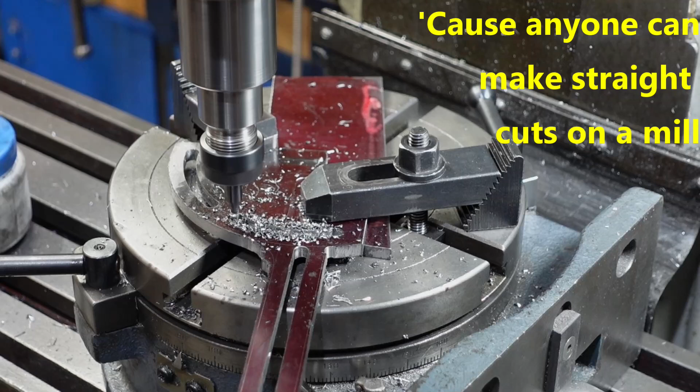G'day. Today I've spent most of today, and for that matter a good portion of yesterday, making up this thing. This is the bracket on the grinder that controls the angle of the point, as well as allows you to adjust for the length of drill bit when you're grinding. For a flat part, it took a bit of work, so I'm going to run through how that's done today.

Use of the rotary table, you can file. I actually blended a few things in with the file just to get that final finish. One thing to note too on the drawing, which I'll flash up later, that slot is dimensioned as 5, but it's actually 6. I put a correction on the drawing, but just make a note of that if you're building one of these at home.

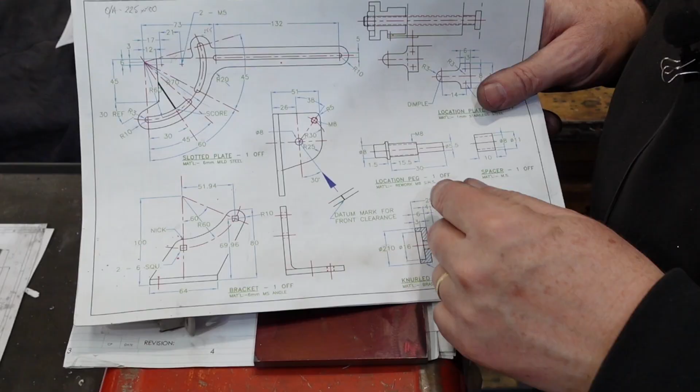The next part I want to tackle, the next major part I want to tackle is this one. This is pretty much key to the whole get your angles right thing. And so I'm going to start on this one just so at least I've got it done and I know where it is and all that sort of stuff.

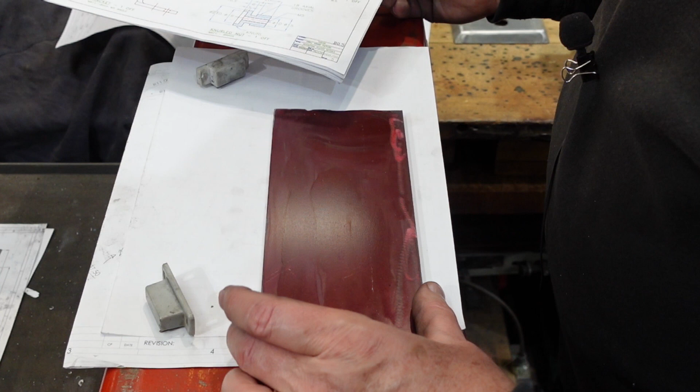It's made out of a bit of 6mm plate, and I've already, I was going to say blued this up, it's actually red. I've already redded this up. I'm going to be doing a lot of marking out.

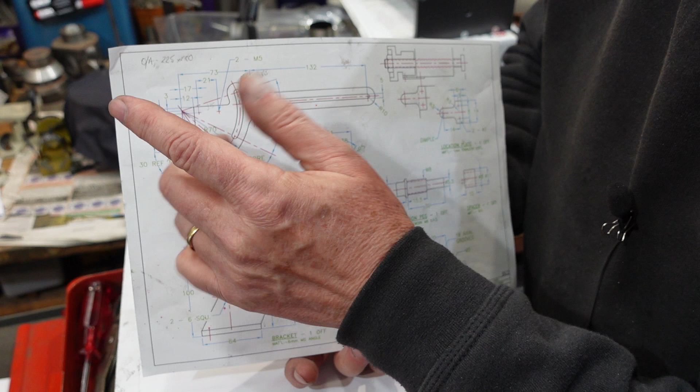Possibly the most important spot on this part is this one here, which is not actually on the part. It's sitting out there in free space. So what I'm going to do with this is make up or leave a tab on here, or leave a flap of metal, whatever you want to call it, with that location centre popped on. That's what I'm going to use to run these radii and also curve some of these things.

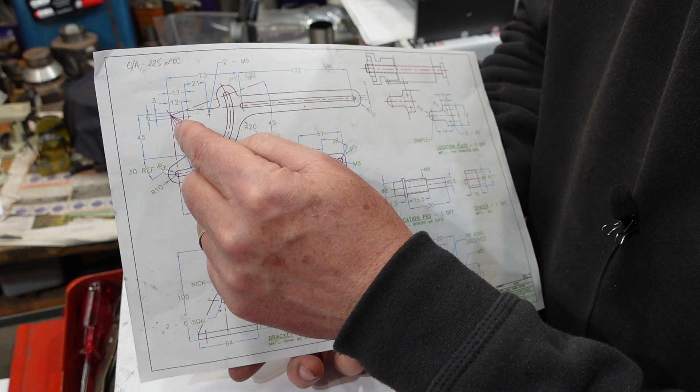The rest of it could be done, I guess, with an angle grinder or something like that just to dress it up. But I do want these radii smooth and concentric with each other. So I'll leave that there, and that'll probably be one of the last things I take off. I'll get everything else to size and shape, and then once I'm happy with everything, cut that bit off.

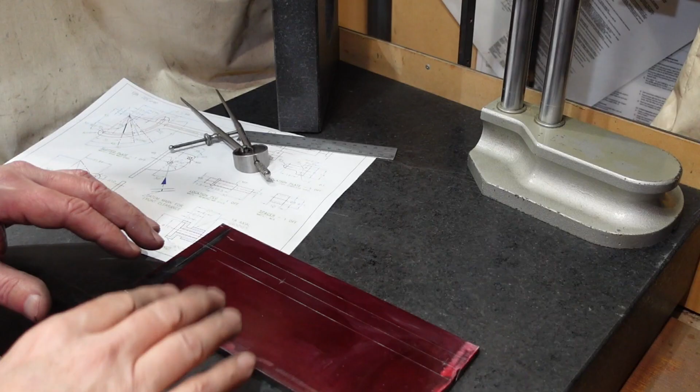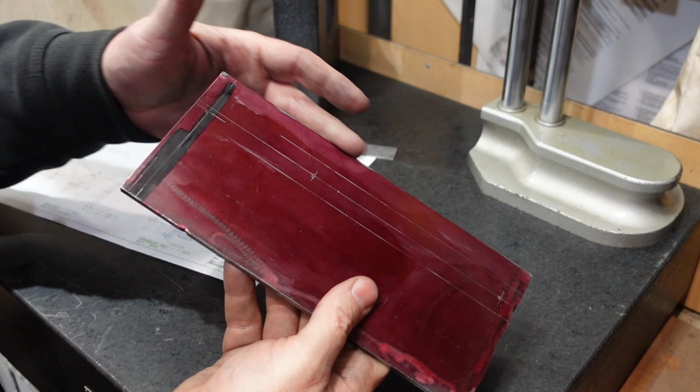So I've started marking out my bit of plate. This was cut from a larger piece with a plasma cutter, so I've got dings on this end, or kerf there, but I've squared that up in the mill, actually both sides, so that firstly I've got something to hang on to, but secondly I've got a square corner that I can work to.

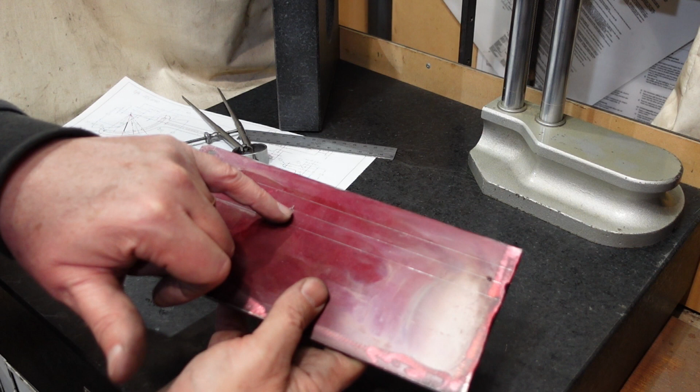So it's just a matter of running lines with the height gauge across. When I've got a centre for a circle, I'll put a centre pop, and that helps there.

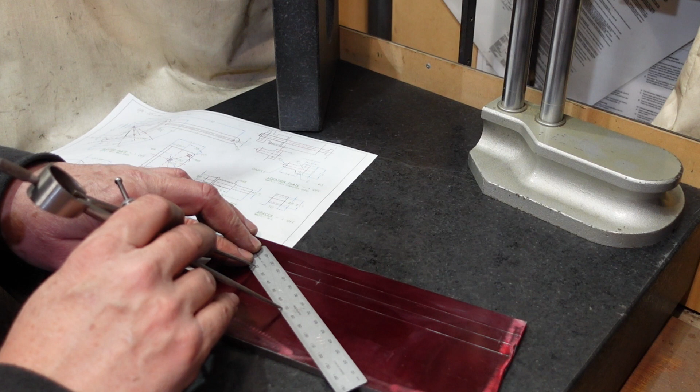I'm just about to start putting some radii in here, and for those of you who don't do this sort of stuff, one of the tricks there, I need an outside radius of 70. So if I put one end of my dividers on the 10 mark and I take this to 80, that gives me 70. But it's better than trying to find the end of the rule there and think you've got it right, because with most of these steel rules, you can put the end of the divider into the graduation mark, and everything is relatively stable.

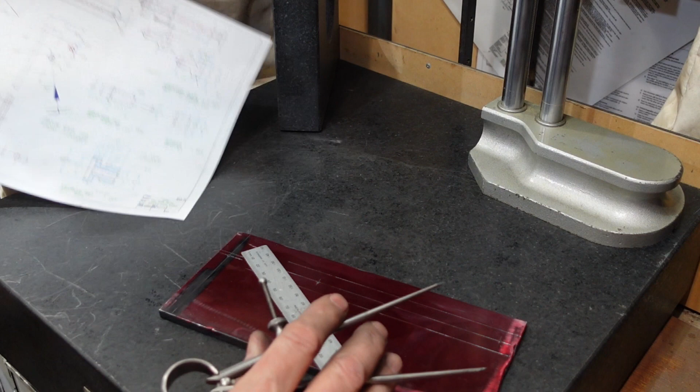So anyway, I'll continue doing this until I get this completely marked out. I don't know how well this is all going to show up, but we'll try. So I've got points in there for the start and finish of my two arcs.

I've got my slot there. I've got some points here offset, because that's how I'm going to form the radii in there, in this case a 6mm drill. There's my datum point. I'm going to leave that on a little tab there until I can't possibly live without it. Live with it. What else is there to note here?

Oh, I'm a little bit short here. I cut my material a bit too meanly, so I'll have to build that up with a little bit of weld. That's not a big problem. Over here I've got a similar issue, but that's just a nick from the plasma cutter, so I may or may not worry about that.

We'll see how we go. So this black mark here is basically from one of the lines skipping a little bit when I was marking it out, so I had to recover from that. I could either put some more of the red layout fluid on there, or just texta it, put a black mark on there and rescribe it, and that gives me my point there.

With these, I think I'll do that slot before I take this material off. What I'll also do is put some 6mm holes here, here and here, and that'll give me the inside radii there, so that when I come to mill this off, I can just come along up to the tangent point of the radius.

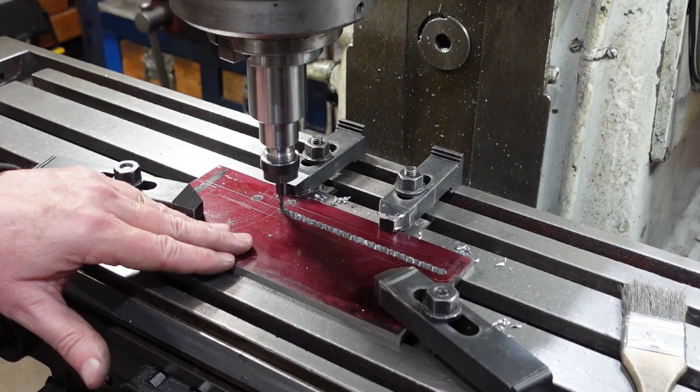I have my plate clamped directly to the mill table with the slot over one of the T-slots. Originally I was thinking about putting that in the vise, but then I worked out that with the vise pressure here, it was going to firstly tend to close that slot up, but as the slot progressed, I'd probably lose my clamping force anyway, and have the potential of the plate going anywhere.

What I've done here is a technique called chain drilling, and back in the days before mills were cheap, that's how people made parts like this. They drilled a whole bunch of holes, and then using a file they would slowly enlarge those holes and join them up and go from there.

One thing with this is that it was done with a 5.5mm drill, and you can't get too much overlap. If you do, the drill tends to want to go into the next hole, and then you've got problems with drills snapping and that sort of thing. So you need to be careful about how closely you get these things together.

The important thing is it's a 4mm end mill, and I'm going to use that to clean the slot up, then slowly, one side then the other, smooth that out so I get a nice parallel slot. This is actually quite important - you don't want it lumpy and bumpy, because otherwise the holder won't slide nicely and won't keep the right orientation as it moves forward.

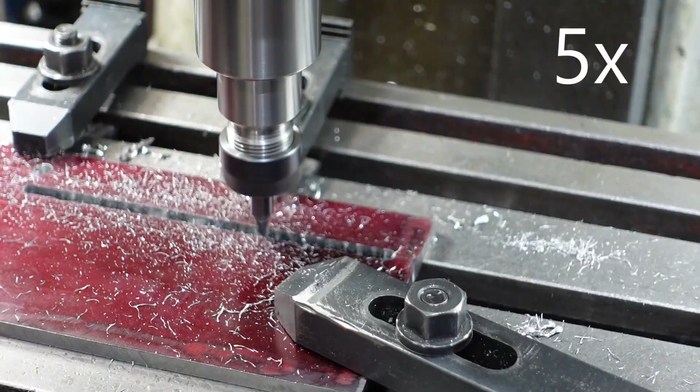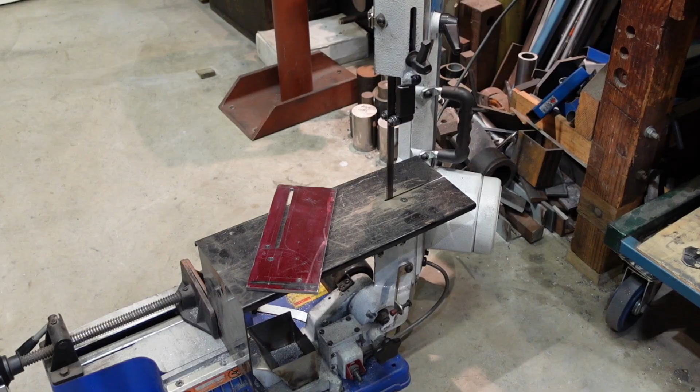Many passes later, there's my slot. That's a 6mm dowel, which is what I'm going to use in there, and that's just a nice fit in there. I haven't deburred that, so once I knock the burrs off the corners, it'll probably be a little bit looser. On to one of the potentially more hazardous parts of doing this.

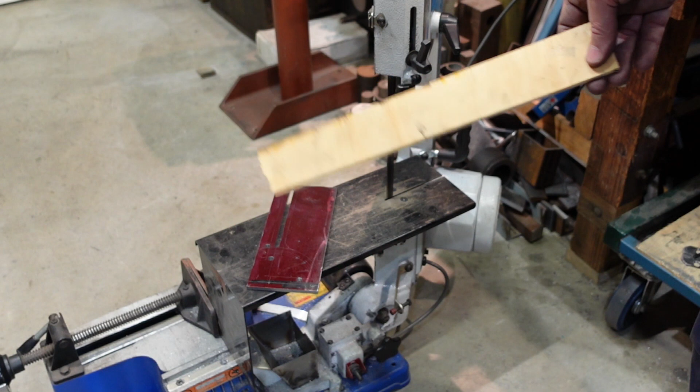I'm going to rough out the shape with the horizontal bandsaw in its vertical mode. The reason I say it's potentially hazardous is because you're going to have a large amount of blade sitting there, and for those of you who don't use these in vertical mode very often, remember your push stick. You don't ever want to be in the situation where your hand or arm is in direct line of the blade, so that if something breaks, snaps, gives way, or hits a void, your hand goes into the blade.

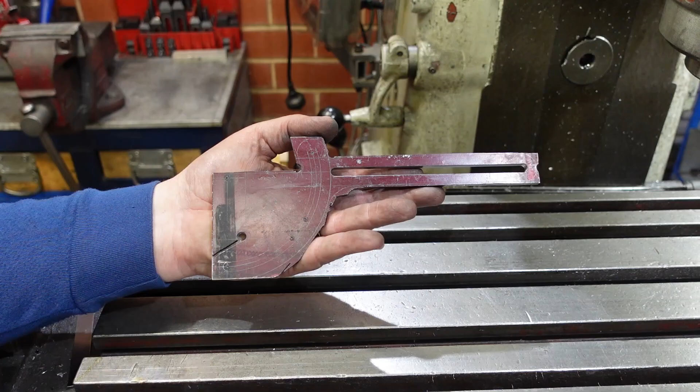This is where I'm up to. I've got my centre point there still, so I can do my arcs. I've trimmed away that material with the bandsaw. I had to do some of the shortcuts with a hacksaw, which I was trying to avoid, but the half-inch blade on the bandsaw doesn't turn all that easily. The one on the hacksaw is not that much better, I must admit, but I've got that roughly hacked out, so I need to neaten that up.

I think the next thing I'll do is probably add some material down here, build that up a little bit, and then I can come in and set this up on the rotary table and actually do some profiling. The slot turned out all right - there's a couple of dings there where the drill bit has wandered. I'm now set up to start carving out some radii.

I've centered my rotary table. I've got my key center pop centered underneath that, and so I'm now just going to run a cut around, smooth that out. The piece of stuff I added, using weld, seems to have stuck them quite nicely, and then it's a matter of doing these two slots here.

I've got this jacked up on a bit of plate just so that I don't cut into my rotary table. I think I should be right here with the slots. I might just nibble on the corner of that, but I'll control the depth, so that should be all right. I'm ready to do these

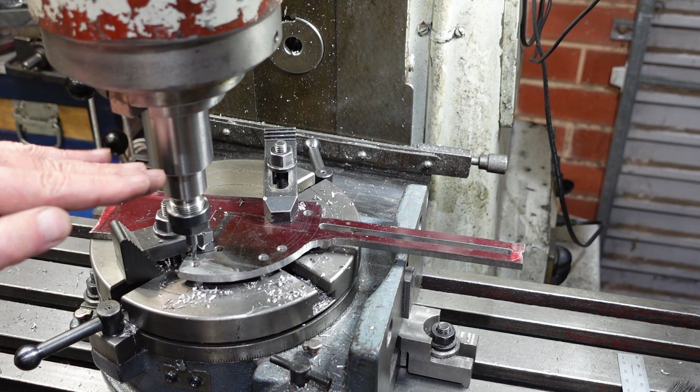6mm wide slots at a radius 60. What I've done is I've drilled diameter 6 holes at each end of the slot. I've got my 4mm cutter, and I'm going to be just sort of lowering it in a millimetre or so at a time until I break through. And then, as I do with straight slots, I'll be offsetting it either side of that centre line until I get to that 6mm.

It's a 2 flute slot cutting end mill, so I could plunge right in, but I'm always a little bit wary of doing that because the cutters deflect a little bit and you don't know whether you're going the wrong way. So there's the first slot done.

So yes, running the cutter down, 1.2mm depth of cut to plunge through, and then offsetting 1 millimetre either side to bring it out to 6. It's actually, I think, 6.1 or something like that. Now on with the next one.

One thing I will mention, when doing this, I find that it's useful to use one of the rotary table clamps to provide a bit of drag on your table. If you don't have that on there, you'll feel every little twitch in the table. If you have that on there, it just smooths it out a little bit, makes it a little bit easier to see where you're going, control it, and feel comfortable with it. So you have to be careful you don't put too much on, but yeah, just a little bit of pressure there does help.

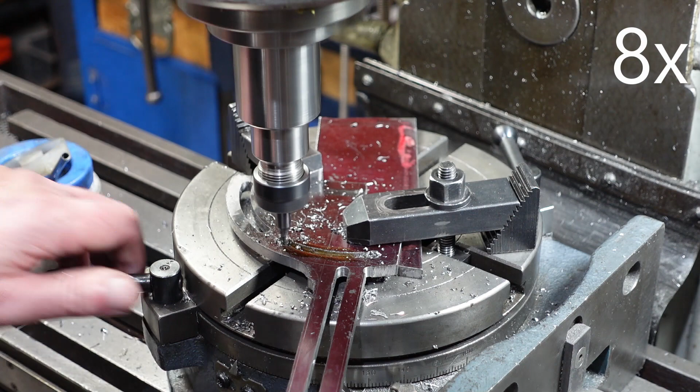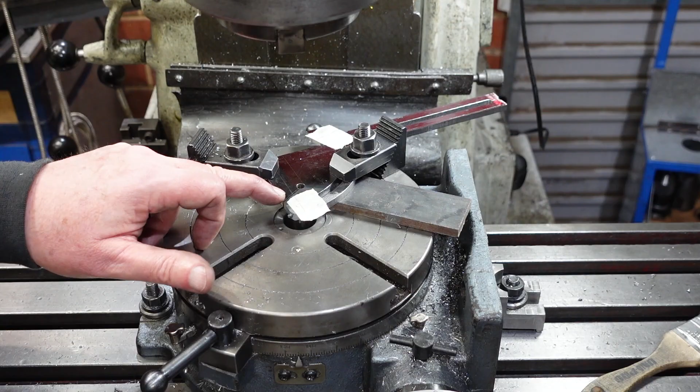For those of you who are thinking it would have been nice to do these radii before I cut the slots, one way around that is I've put a bit of masking tape there. I've marked out the centre using the original drawing, and now I've just lined up on that the pencil cross. I'll take that off before I machine it, but that's one way of getting that centre back again. Another way would be to wedge a piece of wood or other material in there that will give you something you can mark a centre on.

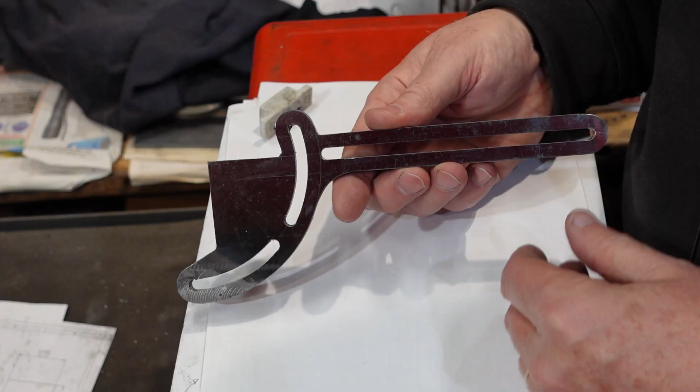And here's the almost finished product. I have a couple of holes to put here. The important thing about those is that they're the correct distance down from here. This way doesn't matter as much, but I've still got the scribe line there that I've filed to, so I can use that to step off, and from here it doesn't matter quite so much.

That score is actually to show you 120 degrees, or 118 if you want to be particular about it. And I'll probably also put one at 135 just for completeness sake. And that's because that's the standard drill sharpening angles. They're actually half the angle, because in its uppermost position that's horizontal, and at its lowermost position that's at 45 degrees. So these are half angles, but there's a mark on the corresponding part this bolts to, and so that gives you sort of a rough idea as to where you have to line up for.